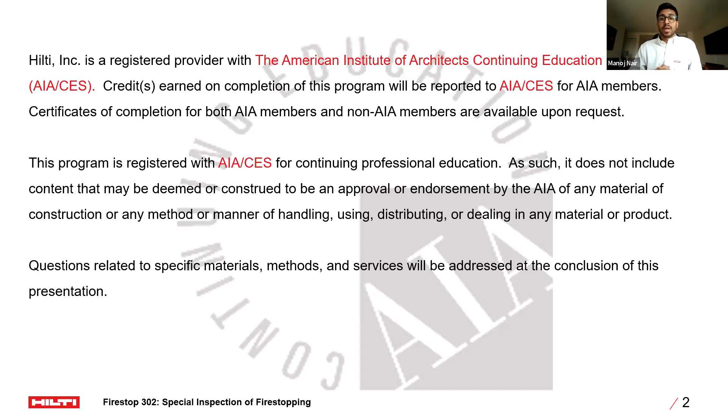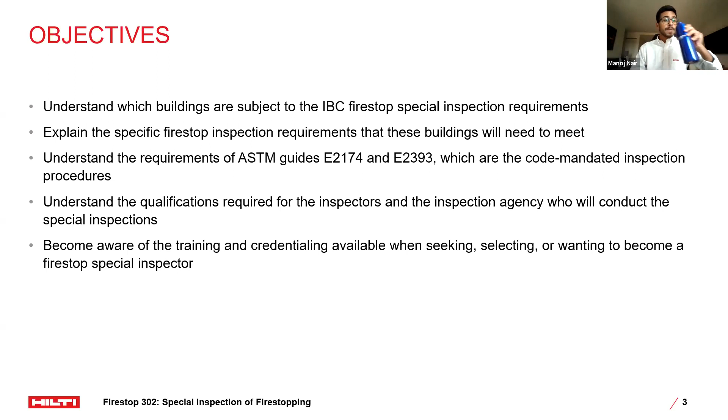There's going to be a few points across the presentation where we'll take a quick moment to see if there are any questions. I'm also going to be speaking up and asking questions. I love interactive presentations, I think it's a good way for everyone to absorb the information. So feel free to hop off mute briefly. I know it can be kind of tricky in Zoom calls, people talking over each other, but no rush for time. If I ask any questions along the way, don't be shy, please speak up. Really excited to present to you guys today, and we'll go ahead and dive in.

Really at a high level, what exactly is a special inspection?

Can anyone tell me an experience they've had with a special inspection, or just your general understanding of what a special inspection is?

No? All right, no worries, we can keep rolling with it. By the way, if I keep looking over to my right, my screen's here, this is where you guys are, so my eyes might be darting here and there a couple of times.

Hey Manoj, just a real quick thing. The very good thing about third-party inspection, and Wayne will be involved as well to explain this - it's great because the whole code requirement, we want to make sure everybody's installing systems 100% correct. That's the key thing, and that's where Code Red, third-party inspection, Vericon, all these companies that do this, they're going to be actually involved with this. So he'll get involved and answer any questions as well. Anything on this, keep us posted. Perfect, thanks Chris, yeah, very good point.

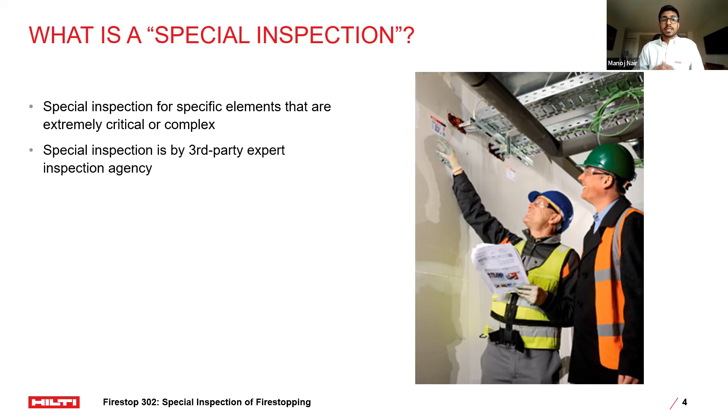Everything's about systems, and we'll dive into that a little later in the presentation. Special inspections are specifically for elements or applications that are extremely critical or complex. Generally, the authority having jurisdiction is going to carry out inspections for the project, but with certain applications or elements of the project that require the inspector to have really in-depth knowledge and experience about that application or element, that's exactly where the special inspectors or third-party inspection agencies come in.

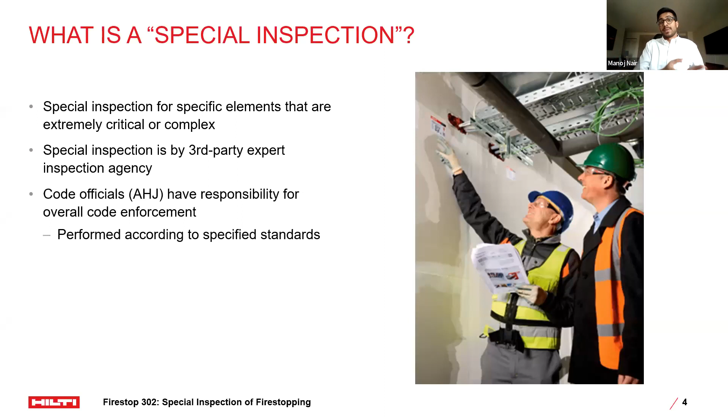So the authority having jurisdiction is still a key member when it comes to choosing the special inspector or the special inspection agency. However, they're not going to be the ones actually carrying out the inspection. I'm going to be saying inspection, special inspection throughout the presentation - it's going to be a bit of a tongue twister, but I'm always referring to the special inspection that the whole presentation is about in general.

Special inspections are mandated within the code, within Chapter 17, and there are various different types. We like to split them up into 3 high-level types. One of them being just ensuring that the building and the location that the building is built on is structurally sound - that's going to be special inspections for what you see here on the left-hand side.

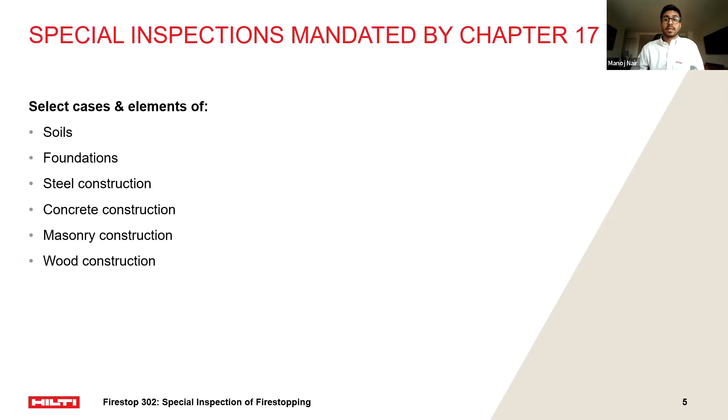Then we're going to be having special inspections to ensure that the building can resist the various loads that it's expected to endure throughout its lifetime. And as you see here, that's going to be these two: wind resistance and seismic resistance, depending on location.

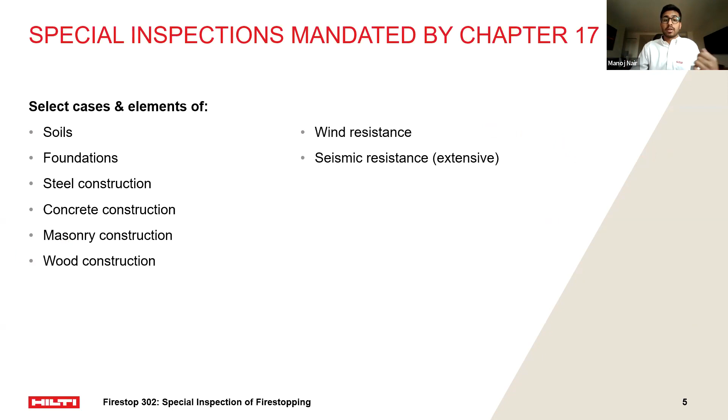And lastly, we have really what's going to be our main conversation point for today - how exactly does the building react in the event of a fire within the building. More specifically, this last section, special inspection of fire stopping. However, there are inspections for smoke control or intumescent fire resistant steel coatings as well.

That's something that Hilti covers and has products for and information for as well. So if you guys ever come across any questions for fire resistant steel coating, don't hesitate to reach out to myself or Chris as well, and we'll be able to help you with any questions. We actually have personnel specifically for steel coatings as well.

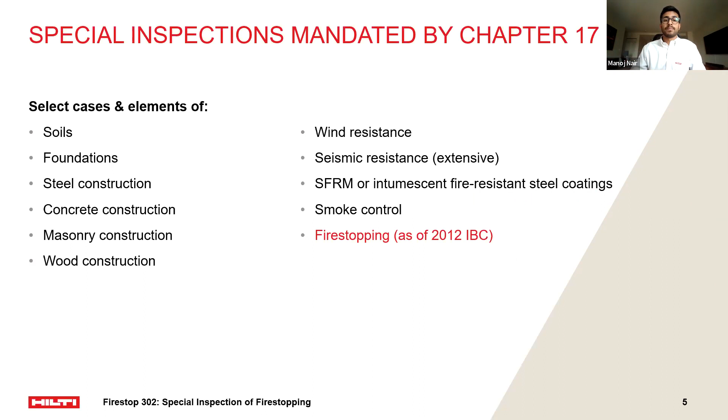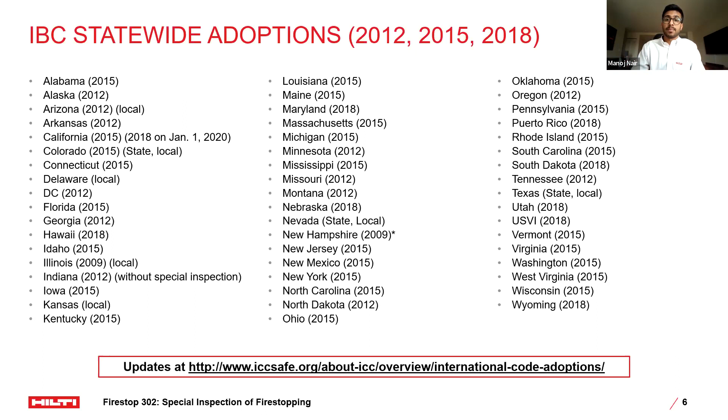For federal or government buildings, there are going to be some specific guides or verbiage for that. However, it's going to be fairly similar to what you see in IBC 2015. In terms of requirements for a special inspector, they're going to have similar verbiage needing similar experience in actual work experience, as well as the proper education and certification.

We'll be talking a little later in the presentation. Really, the last section is going to be about the certification process and all the content that goes with it. But the main thing to take away, which we'll dive into deeper later, is what are the exact requirements ASTM standards have that the inspector needs to be able to fulfill.

So we talked about what exactly is the special inspection, what that entails, and who's going to be involved. Now we're going to talk about what type of projects actually require special inspections. This is called out in chapter 17, more specifically section 1705-17, as you see on the left-hand side.

Sorry, my mouth is getting really dry. I don't know if it's this cold weather, but I'm going to take a couple water breaks here and there. So this is a bit of a meaty bullet point.

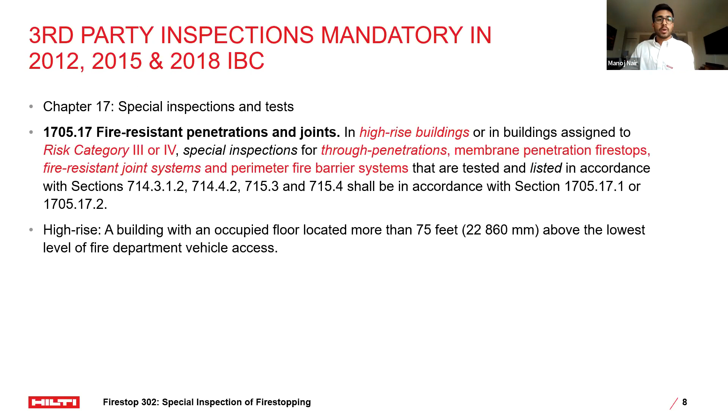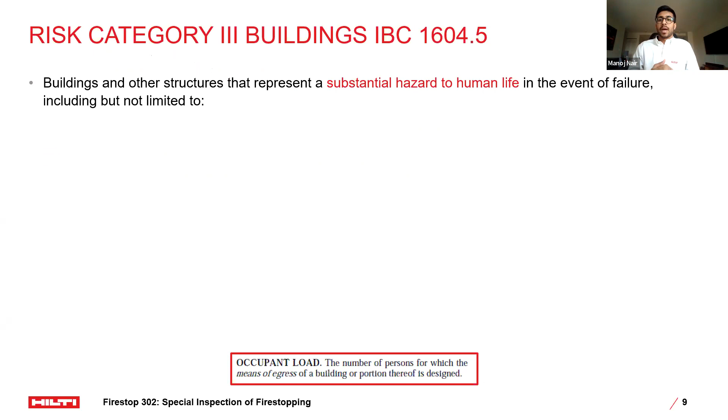So as we said, high-rise buildings, risk category 3 and risk category 4 buildings. Risk category 3 is any type of building that represents a substantial hazard to human life in the event of a failure. So these are buildings like public assemblies, schools, emergency treatment facilities, prisons, and any building with an occupancy load of more than 5,000 occupants. In addition, you have power generating stations, and any building not included within risk category 4 that has toxic or explosive materials.

We just want to make sure that these buildings with a large number of occupants are up to standard and have fire stop systems installed correctly. The trend you'll see across these bullet points is you want the installation of the system to be code compliant, accurate and consistent. So when we talk about the new technologies within the fire stop industry a little later, that's really going to become a key word: consistent and accurate installation. We'll touch on it a little later.

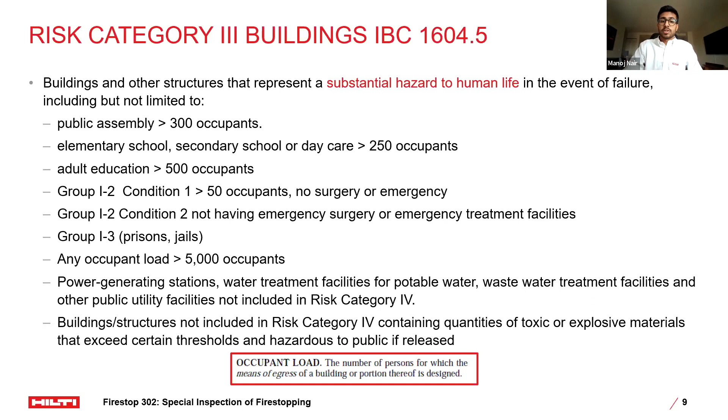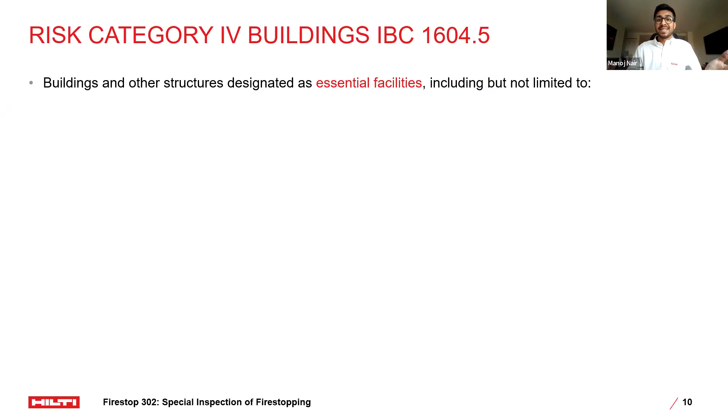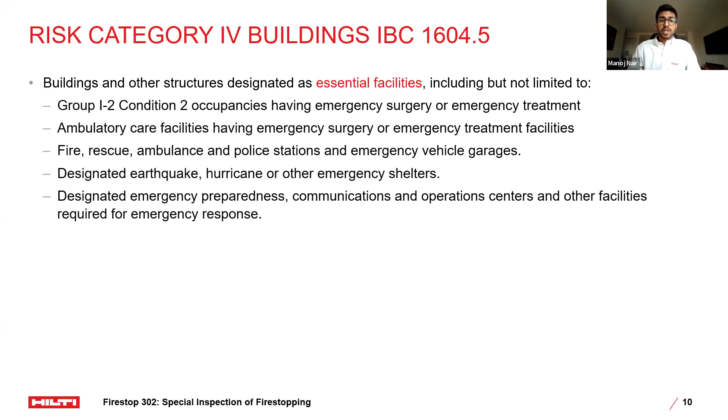Next we have risk category 4 buildings. These are buildings designated as essential facilities. I generally like to look at these as the buildings that our community relies on, whether it's day-to-day or if a natural disaster occurs. So those are buildings such as emergency treatment facilities, police stations, emergency shelters, communications and operations facilities. Again, power generating stations for public utilities, control towers, etc. Really the places that our communities rely on.

So it's our responsibility to ensure that we're installing the correct, accurate, code compliant fire stop system, and that it's actually going to work in the event of a fire in one of these areas. It's a little tricky because we're designing for a worst case scenario, but when that scenario happens, it's extremely important because the lives of our communities are in our hands in a way. So it's really important that we're making the right decisions, trying to be as accurate and consistent as possible.

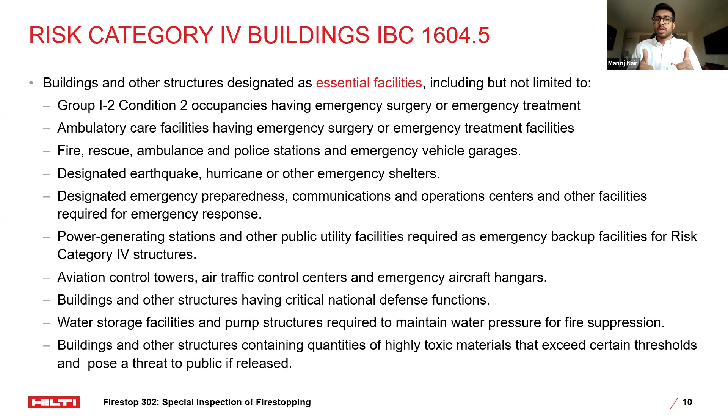So any questions so far on these various topics? I don't see anything in the chat, so I think we're good to go. You're good, so we'll go ahead and roll into the actual requirements of these special inspections.

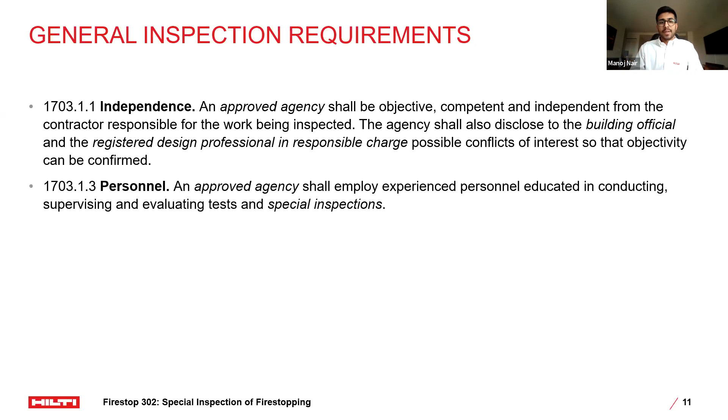The agency for this special inspection cannot have any conflicts of interest with the actual installers or contractors. You're going to see this term a few times in this presentation: approved agency. This means the agency has been approved by the authority having jurisdiction. The authority having jurisdiction doesn't carry out these special inspections, but they're a key player in determining who will. They'll get a submittal from the owner or the owner's representative proposing the special inspector agency, and they'll look at their credentials, whether it's experience or specific certifications, to judge whether they're appropriate to carry out that special inspection. The personnel within this approved agency must have that appropriate background and experience as well.

So who exactly is writing the check for the special inspection? As it says here in red, the owner or the owner's authorized agent is going to be the one paying for the special inspection. Another key thing to note is that the smoother this process goes, the less time it takes, the less the owner has to pay. So the influence you have as a specifier, selecting the appropriate systems and using the latest technologies when it comes to firestopping, can make that special inspection process go more smoothly, potentially saving the owner money and general headaches.

I know from some specifiers I've spoken to in the past, RFIs can be used as a metric. Generally you want to have fewer RFIs per project. Obviously, things happen on site and issues come up, that's just the way of the world. But if you're able to select firestop systems early in the process and communicate those to the contractor, you can control what type of products or technology is used to ensure that process goes smoothly.

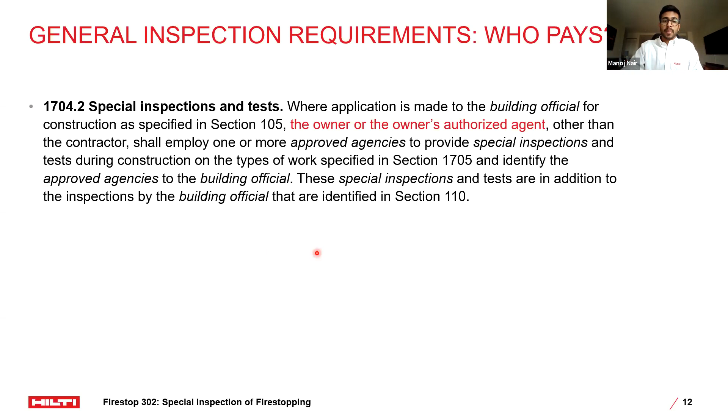We talked a lot about the actual process of getting the inspector on, and I've mentioned experience and qualifications, but there are actually specific ASTM standards that call out these qualifications: competence and relevant experience or training for special inspectors, as well as related complexity to the same type of special inspection or testing activities for projects of similar complexity and material qualities.

So what exactly does that mean? This gets a little wordy, but what it's saying is the inspector carrying out the inspection for a specific project type has to have relevant experience. For example, if they've been inspecting schools for firestopping their entire career, and then they're proposed to do something like a manufacturing plant or a power plant, they may not have the relevant experience to know what to look for based on the applications commonly seen there. So it's really important that the special inspector being called out has that relevant experience.

In addition to an inspection agency, a design professional can be responsible or involved within that process, but they still need similar requirements and qualifications.

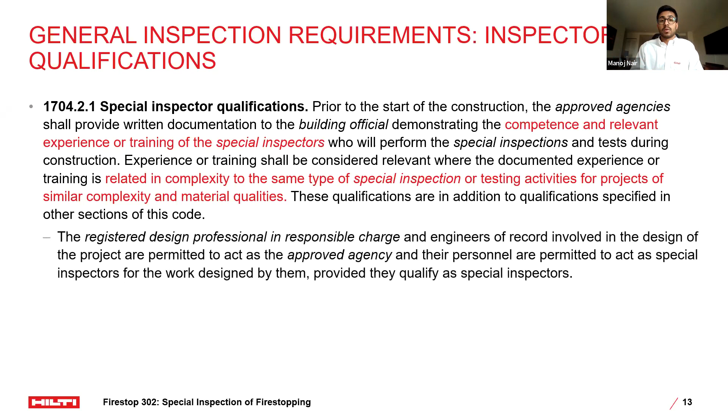So I mentioned in the previous slide that there are specific ASTM standards that call out these requirements. They are ASTM E2174 and ASTM E2393. Off the bat, acceptable by the AHJ, kind of a no-brainer at this point, they're going to need to make sure they're qualified. These are some of the qualifications they'll look at. As you can see at the end, these are all 'ors,' so it can be one or the other, meeting certain criteria. You'll see the standard a little later in the presentation.

Minimum two years of inspection experience or being part of a quality assurance agency. We'll talk about what that is a little later in the presentation, but at a high level, it's an agency that has been accredited for special inspections, and they get that by having personnel with the appropriate qualifications. Again, as I mentioned earlier, no conflicts of interest.

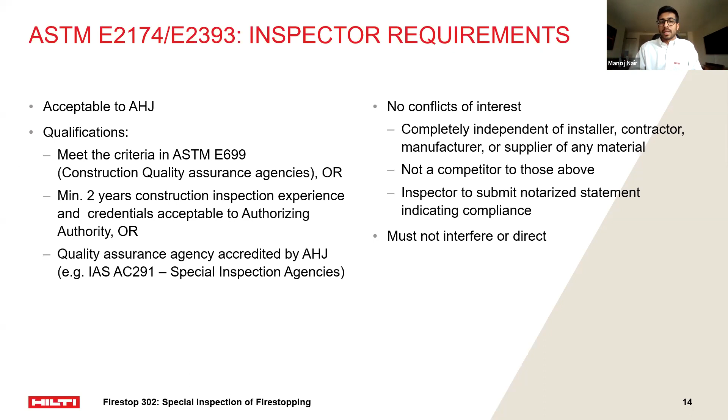So the special inspector cannot have any sort of competition with the contractor who did the firestop installations throughout the project, and they must generally be completely independent of them. Again, kind of a no-brainer, there just can't be any conflict of interest, as in normal projects.

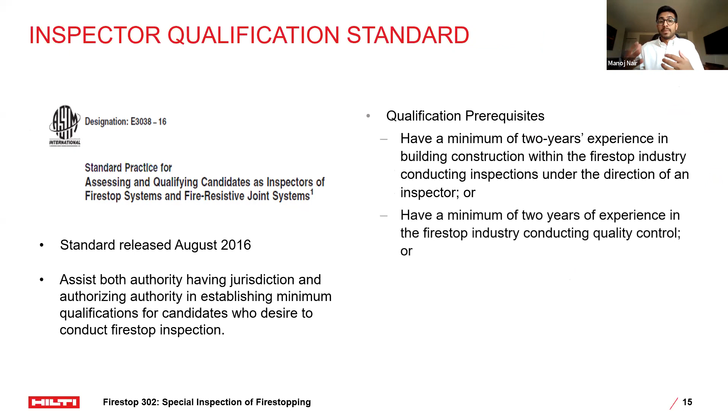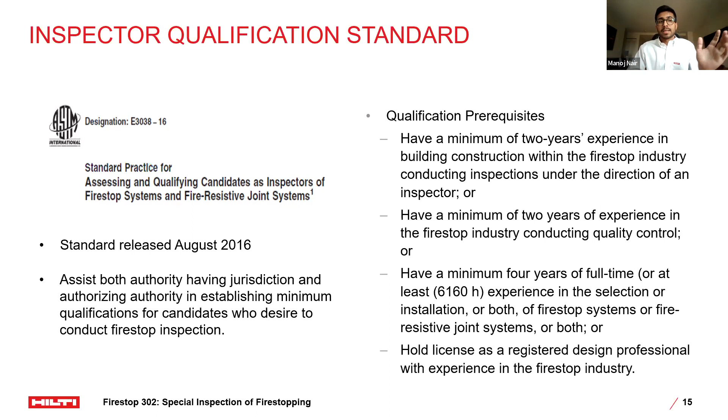In addition to that, there is an inspector qualification standard, fairly similar to what we saw before. These are the prerequisites on the right-hand side of the screen: minimum experience within the construction industry as well as the firestop industry specifically, minimum experience conducting quality control, and minimum experience when it comes to selection or installation of firestopping. This resonates very similarly to what Wayne said his experience is, working with Hilti as a manufacturer rep, working for a contractor, and now doing the special inspections and carrying them out himself. Lastly, you have the option of holding a license as a registered design professional, as I mentioned a little earlier in the presentation.

So how exactly is this inspection conducted? I'm going to read these brief bullet points, but Wayne, if you can, I'd like you to jump in afterwards and give us a rundown of what that process looks like.

As I mentioned earlier, the two sections that call out the different applications that are part of these special inspections are seen here. It's for penetration firestopping, as well as fire resistant joint firestopping. These two standards at the bottom, ASTM E2174 and E2393, call out these processes as well. So again, the approved agency needs to be in accordance with those.

Wayne, I'll hand it off to you if you want to talk about your experience. Well, let me keep it as simple as possible by talking about the two standards. Both of these standards have been around - 2174 was first published in 2001, and I think 2393 came out in 2004.

2174 says that you must conduct - there's two options, and really only one of them works. The two options are to do installation observation, which says you have to observe the actual installation of the firestop system for 10% of all the firestops on a project, and you have to do that randomly. In 2001, when the initial group put this together, this was all very new and it seemed like a feasible thing.

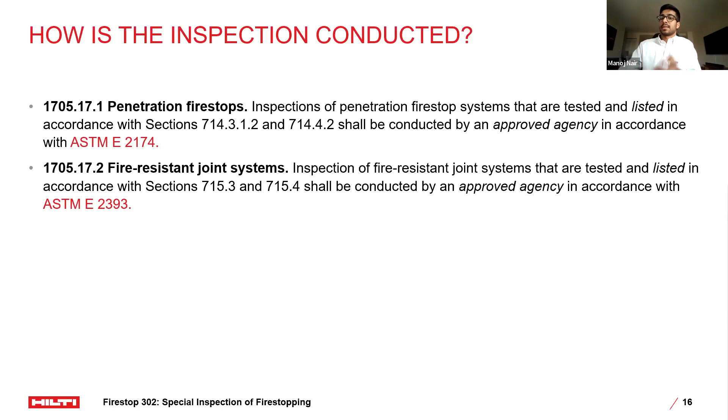We'll go ahead and roll into the next slide on the topics you brought up about the actual inspection process. As you mentioned, statistical sampling is very similar to destructive testing—making sure you have the right amount of mineral wool as well as Firestop product, whether it's sealant or spray. In addition to that, verifying the materials prior to installation. The next one, a really important one, is verifying against listed systems and/or EJs.

Again, you might be able to speak on this as well, Wayne. When you're inspecting a specific system, from my understanding you take the physical system that's been submitted and approved, and then compare that to the actual installed system to make sure they're correct and both are code compliant.

That's correct. This is one of the things we kind of pound on again and again—a lot of GCs and traditional subs are not used to this process. They have rarely, if ever, had their Firestop installation fail in the past. The building officials, vast majority of them will readily admit that even if they had the depth of knowledge needed to inspect this, they don't have the time.

Just speaking for Vericon, we're typically on site about 6 hours for an inspection on your average commercial project—sometimes as little as 4, but rarely less than that. To be able to go through all these things, hit the numbers in terms of the percentage of destructive testing we have to do, we're doing a lot of review in the office before we get on site of the systems and EJs.

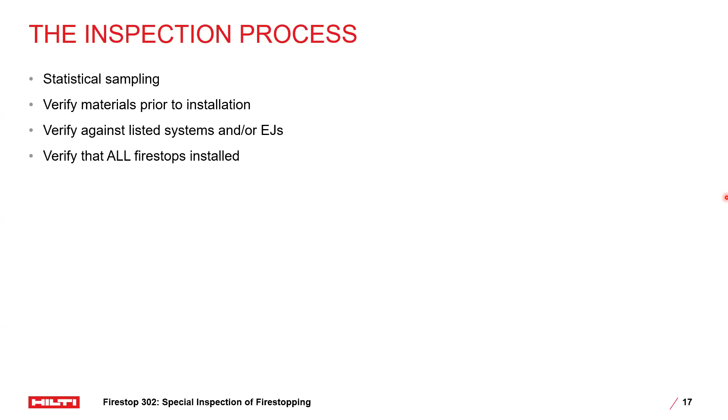Now, the reason I'm mentioning this, and where you as an architect have influence, is for one, calling out specific preformed devices in the specifications - that's one way of influencing it. Another is providing a firestop schedule for that specific project.

I mentioned earlier that EJs come up, it's just part of life, and they need to be dealt with on site. However, there are a lot of general applications that can be seen across a project. So being able to call out the specific systems that utilize preformed devices, and submitting that to the contractors and having the subcontractors use it, gives you more control over the consistency and quality of the installation.

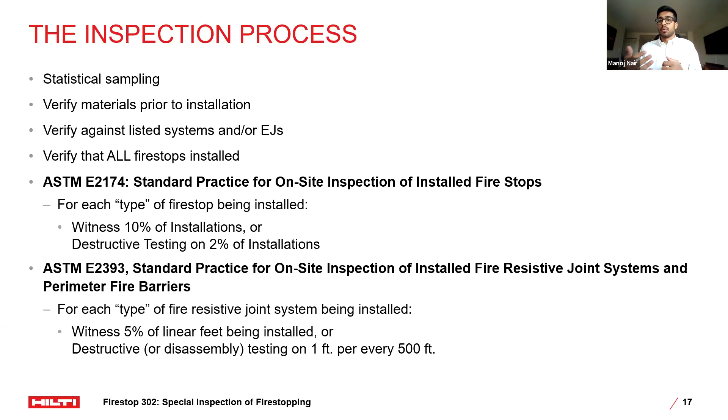Now I want to pass it on to Chris, our fire protection specialist. He has an immense amount of experience in the field, so I wanted to talk through what he sees in the field in terms of the benefits and what this inspection process looks like from his end.

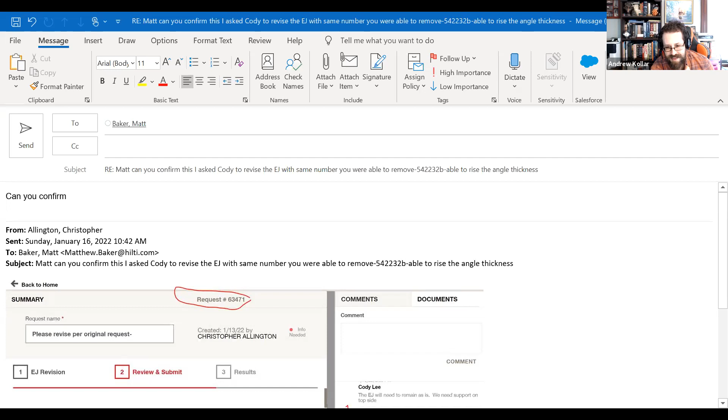Okay, can everybody hear me okay now? Hear you just fine. All right, perfect. Is it possible, how do I share my screen on this? I always do Teams meetings, I don't do this too much. Normally the easiest way is to make you into a co-host. Oh, there we go. We're sharing mine, and it'll be an option for him. I'm just looking at the different areas to see if I could sign on to this. Why am I not seeing you? I think you'll need to stop sharing your screen also. Okay, done. Let's see if we can make a co-host. Try it now. Okay, what do I do? On the bottom of the screen there should be something that says share screen. Got it, perfect. Click that and follow the directions. Hopefully I'm doing this - wait a minute. You should see all your different options pop up, and you can select the one you want to show us. That's what I'm trying to search. This is interesting, how do I find it? If you already have it opened - oh, there we go, now I can see your screen. All right, can everybody see this right here? Yes, we can see an email. It looks like an email to Matt Baker. No, how do I do this? I don't want to tie you guys up on time here. I've got a presentation on here right now. Do you have multiple screens on your computer? Oh yeah, I think you shared the wrong screen. If it's easier, grab what's on the other screen and move it onto this one and switch them. Yeah, that's what I'm trying, but again. Let me stop sharing and share again - it should give you a choice of which screen to present.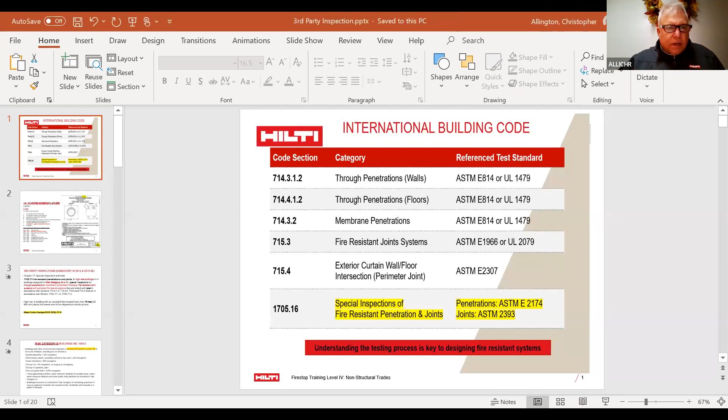Okay, and again, this is stuff that Manoj probably already kind of went through most of. I just wanted to cover a couple quick things on my presentation part. Again, you saw all this information that's listed right here. This is all the code requirements.

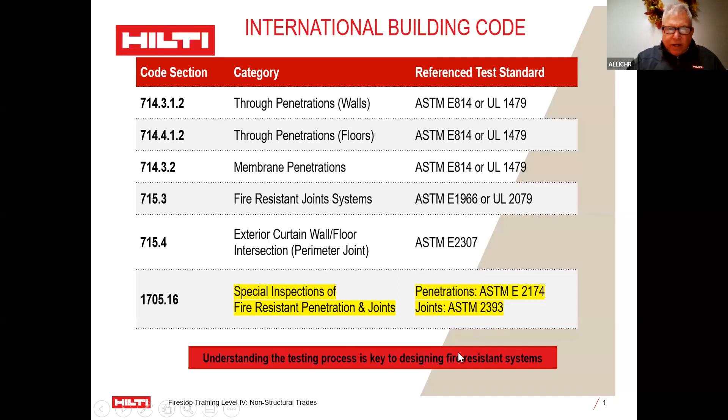And as mentioned, there's the third-party inspection information down below, which he already talked about. The main reason that I like to talk about this, when I do the training, and I work with Wayne quite a bit on a lot of projects. He does a great job.

Biggest thing, a lot of people just install firestop material. Can anybody tell me what the rating of a firestop product is? I need an answer from someone. I mean, it seems like a silly question. It depends on what wall you're sealing. Okay, not one size fits all. Well, again, correct. So when I always bring up this point about firestop products, products are not rated.

You have to make sure you install a system. And that's why it's so important when on specs and stuff like that. If you notice this right here, does everybody see this detail? This is an example of a detail of a through-wall penetration. And notice it has a number assigned to it. It's a nomenclature from UL, Underwriter Laboratory.

So when they do the burn test and the hose stream test, they have to approve what manufacturer's product was actually used, and you'll notice it's listed there. And if you notice the numbers, notice W-L-1054, the letter W stands for wall, the letter L stands for a gypsum wall, and the number 1000 means you're dealing with a bare metal pipe, and it shows you all the information on how to firestop that according to plan.

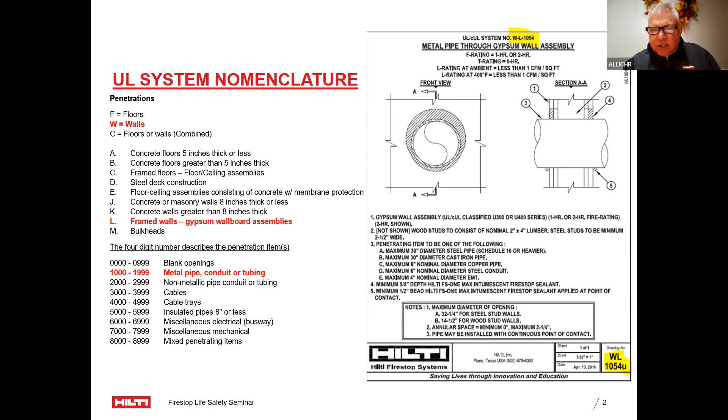So this is the most important thing when I do the training with everybody. I make sure that they follow the guidelines, because if somebody just squirts red stuff in a hole, they're no good. And a joint, same thing. That's why we have to make sure everybody follows what a guideline is of the UL detail. And he already covered all this information, so again, I don't need to go through this again.

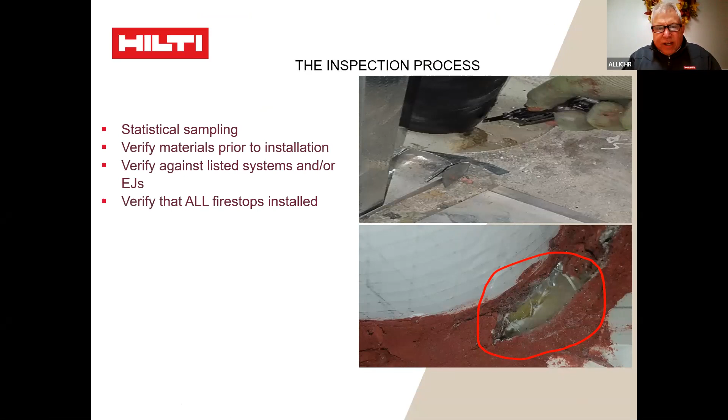This right here is an example, exactly to what Wayne just mentioned. Here's an example of penetrations when they do the third-party inspection. They'll actually cut out the samples. That's the 2% destructive testing minimum, to make sure the installation of the products is getting done 100% correct. Does everybody see that? I just want to make sure I can show how this actually looks.

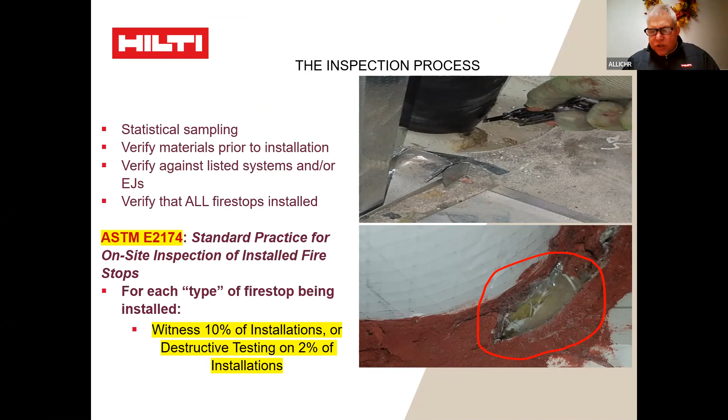4 PCF is pounds per cubic foot. Sometimes if somebody doesn't put the right compression or the right mineral wool in here, that's where they're going to fail, because it doesn't meet the requirement, since they have to have a deflection capability for the floor above. So for joints, it's very important to make sure people are following that guideline.

To the point that Manoj already talked about, the preformed products like the TTS product and stuff like that. That's just an example. Anything that's preformed also helps out, because now they don't have to worry about putting in a certain compression of mineral wool if they go that route. Again, just options, I want to make sure everybody gets that.

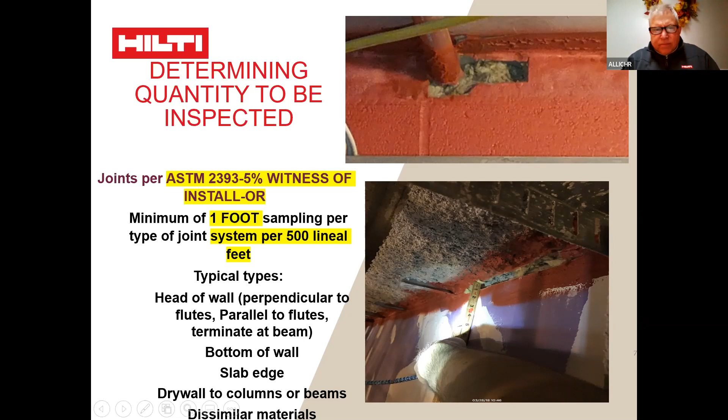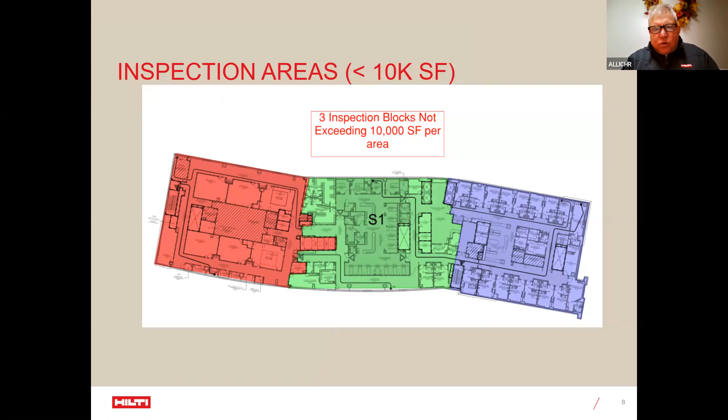And then when they do the inspection, I'm just not sure if Wayne wants to talk about any of this, they do certain areas not exceeding 10,000 square feet. They'll actually do certain sections for those third-party inspections.

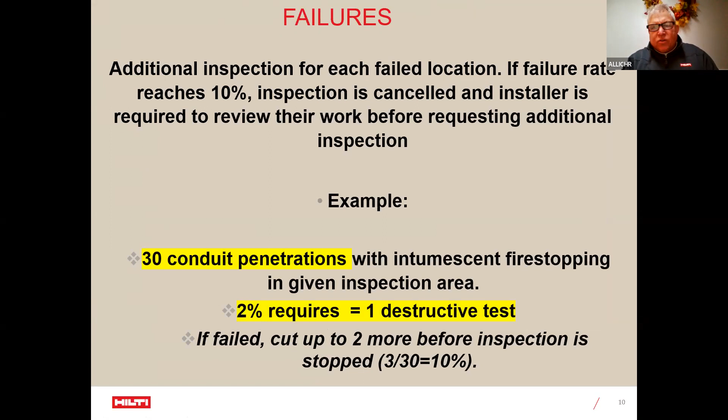If there's failures, like Wayne already mentioned, this is all the information that I give everybody as code guidance. If there's a failure, that's going to hold up the project, and that means walls can't go back up anymore, things can't proceed. So it's very good to make sure we meet these descriptions of these installations.

This right here is an example of some penetrations that were fire stopped. A lot of times, maybe in your specs, it calls out that the fire stopping needs to have a system number assigned to it. This sample shows what the UL system number is and what the fire stopping is. When the inspector reads this, they go through and verify the depth of product and how it's installed.

One thing I'll bring up - let's say this is a rated wall. Notice all the gypsum installed - did they mud and tape the actual butt joints yet? No, and that could be an issue, because if somebody fire stops this before the wall is finished, you want to make sure the UL wall details are constructed properly. If someone just puts a bunch of fire stopping around this, it'll be very difficult to actually get the wall rating built properly.

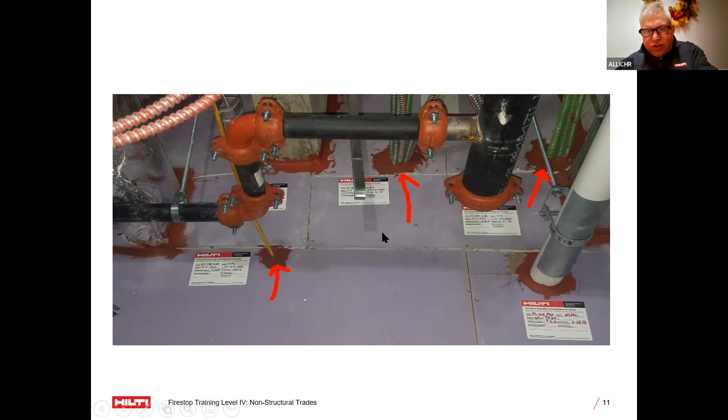This is all stuff I like to share and show during training and education. Even though somebody puts details up, these are all just examples of what the system is - it calls out what the actual UL number is right here. If you go down and read the UL detail, this number, WL7059, calls out a duct that's actually passing through this wall.

Unfortunately, when the measurement was done, it calls out that the duct was greater than 34 inches. If you read this detail, it calls out what the maximum duct size is - 24 by 12. Does that meet that fire stop system? Absolutely not, because the system numbers have to match what these details are. So that's why it's so important to make sure installers are following the guidelines of the details.

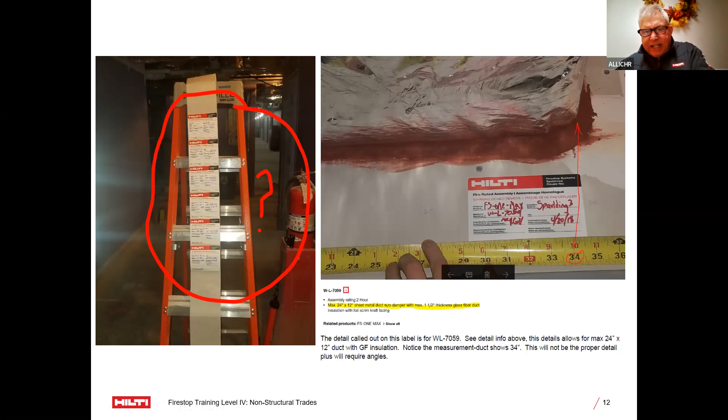I only have a couple more slides I want to share, but does everybody know the terminology? I think Manoj already talked a little bit about this, but this is something I definitely want to make sure everybody gets. When you look at the different walls, notice they have different wall type names.

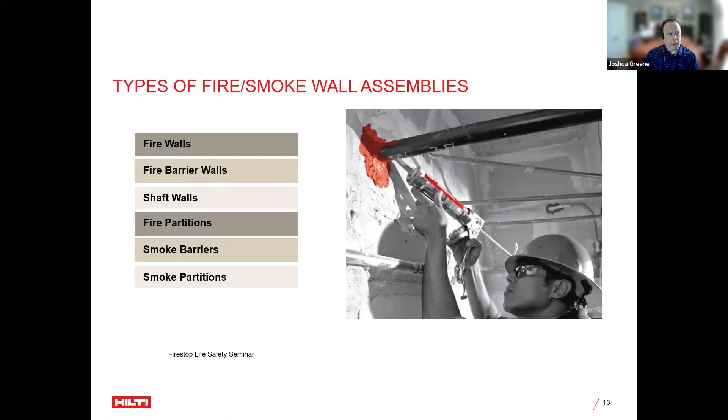The biggest question I always ask people: when you look at a smoke wall, see these two right here? Are smoke walls required to maintain a fire rating? It depends - smoke barriers have a 1 hour rating in certain applications, smoke partitions do not. That's why a lot of people don't know that. They hear the term smoke, and the next question I ask is, if it's a smoke wall, find out - is it a barrier or a partition? Exactly what you just said, Josh.

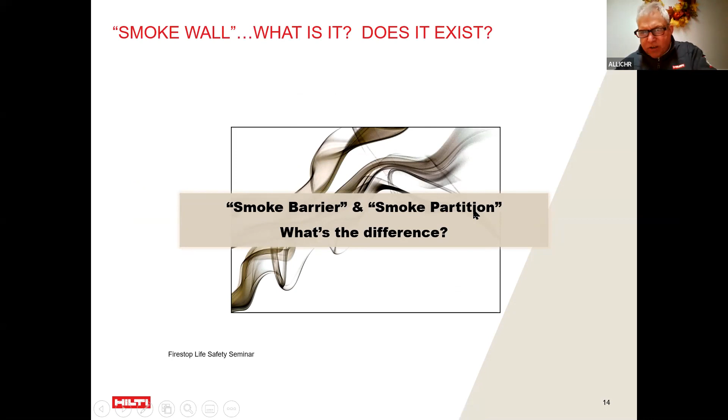When you do that, where is a smoke barrier wall required? They're required either in hospitals or prisons. Why? Because if there's ever a fire in a building, what are people supposed to do when the fire alarm goes off - everybody's supposed to leave the building. If you're in a prison or a hospital, can everybody just leave the building if there's a fire? No. So that's why these walls have to be built and protected properly.

Does everybody know what L rating stands for? This is another key thing, because you'll notice this right here - when you deal with a smoke barrier, in addition to a fire rating, minimum 1 hour, you also have to maintain an L rating. L rating is air leakage. If the system that was installed doesn't follow the guideline of what an L rating stands for, that's going to be an issue.

It doesn't meet the code requirement. So again, this is something that I put on there. I just want to make sure everybody understands that as well.

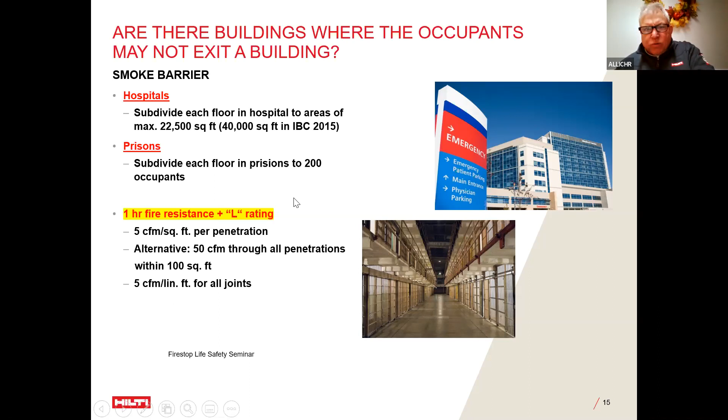When you look at this, check this out right here. Here's a third floor, and let's say this is in a building requiring a smoke barrier. Look what just happened right here. The whole intent is this wall now, because it's a smoke barrier, has to maintain a fire rating, minimum 1 hour, and an L rating. Because if there's a fire on this side, you have to move everybody over to the other side, or versus this way, if it goes this way.

This wall has to protect everyone, because what's the leading killer in a fire? Smoke and gases. Yep, exactly. So that's why L ratings are so critical when you deal with these smoke barriers, okay? So again, that's just one of the key things that I go through, and I go through all this information.

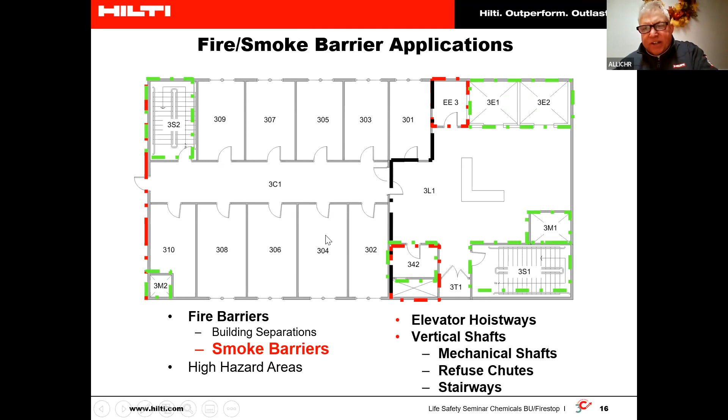You'll notice not every wall is fire rated. And the reason I bring that up, I just want to make sure everybody understands this also. When you deal with a smoke partition, walls are not fire rated, okay?

So anytime you deal with a wall that is not rated, it's just calling out a smoke wall, okay? You want to make sure you use a product that is approved to meet that. Most manufacturers have products that do that, okay? But again, a lot of times if somebody just used mud and tape around a penetration, it does not meet this code requirement. So just a heads up on that. That's one part of the trainings that I deal with as well.

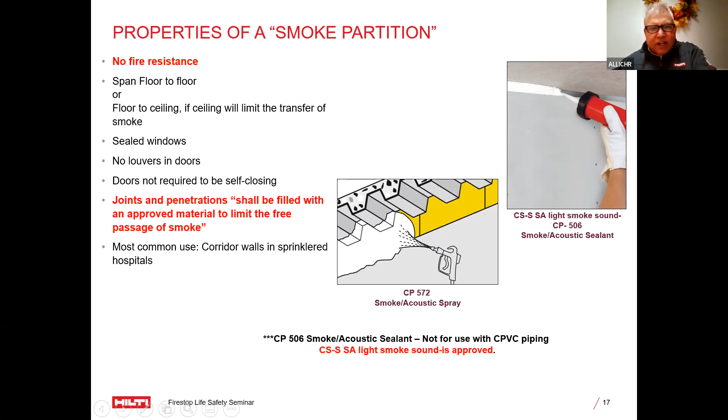These are always going to list what the UL system numbers are prior to the inspection, okay? So this is when I do my training. I make sure that everybody follows the guidelines, and they make sure that they follow what the detail is and how the fire stopping has to be installed.

Most important that goes on these letters is the actual UL listing. And if it's not a UL detail, we have to create an EJ, which again, I think Manoj already mentioned that. EJs are engineering judgments. That's a field condition that may not meet a UL system, that the manufacturer can actually design and we can sign off on to help out with the installation.

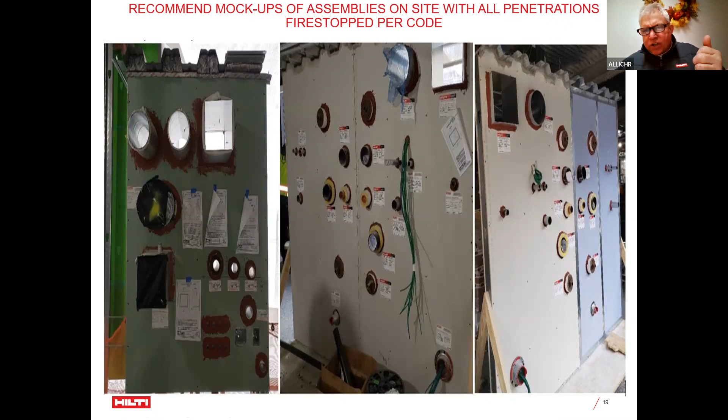So we always want to make sure before anybody installs a fire stop material, whatever the manufacturer is, make sure they have a detail, whether it's a UL system or an EJ, okay? So that's pretty much the key. That's pretty much my information and stuff like that. And this is all the stuff that I kind of guide and help on. So hopefully that was helpful. If there's any questions I can answer, just please keep me posted on this.

And again, if Wayne wants to add anything to this information, because again, he knows the L rating. He's been talking about this on many projects as well. So we just want to make sure we cover that. L ratings are so important when you're dealing with a smoke barrier wall. Okay, again, thank you. If any questions, please bring them up.

If I can interject, Chris, you've been tremendously helpful on a lot of my projects by coming into the field during construction to give assistance to the contractor. So if he runs into a problem, everybody should know that Hilti is available. And I believe this is true of other manufacturers too. But you've helped out where we had some odd conditions and the installers could not figure out how to do it. And you were actually able to come out and help them develop a system to do it.

And then you issued the EJ to address those issues as well. Yes, exactly. And again, great to see you, Jake. I haven't seen you in a bit, but nice to see you. Thank you for your time.

That's why all I do with the company is go out and train everybody, educate as many people as possible on site, to make sure people are following the guidance and guidelines. Because even on a job that's not getting third-party inspected, that same company could go to one tomorrow that is getting third-party inspected, and suddenly ask why is this so different. They have to follow the guidelines no matter what job they're on, even if not third-party inspected, following the systems and installation exactly based on these code standards. So anything that's ASTM 2174, ASTM 1966, Edge of Slab 2307 - those are all standards and code requirements that everybody has to meet.

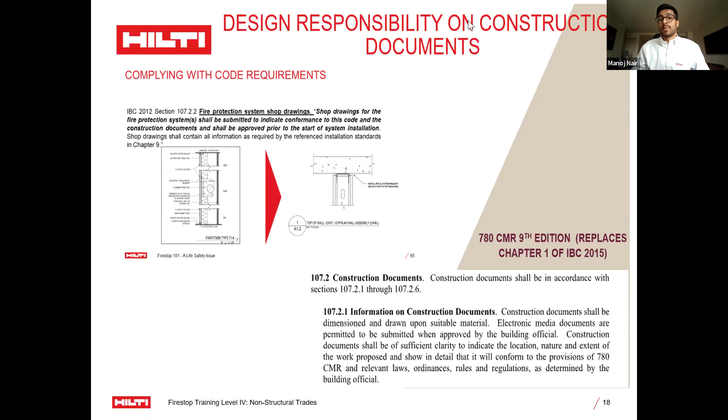So just a bit of context on that technology. I'm going to go ahead and share my screen once again, and we can hop back in. Can you guys see my screen? Give it a thumbs up. We can, yes. Perfect. Thanks, Andrew.

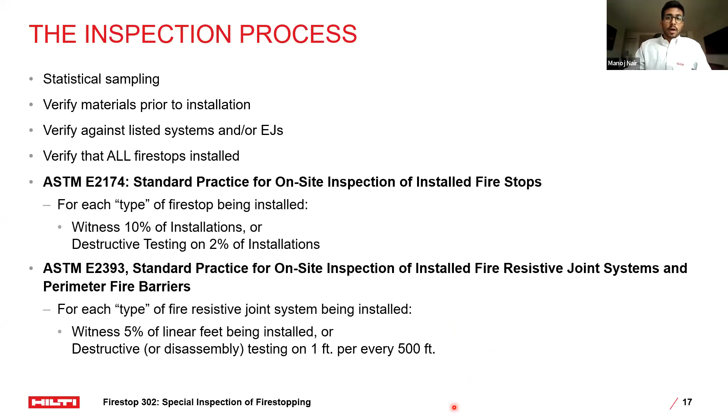All right, so really continuing what we said, I think Wayne mentioned this earlier. If a non-compliance is identified, according to these points here, 10% of non-compliance for one specific application, inspection is halted and they have to re-inspect their work. Obviously, a non-compliant fire stop system has to be replaced or repaired.

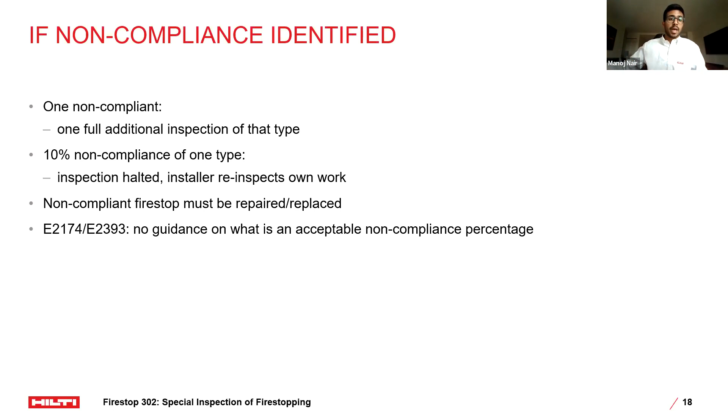There's no specific guidance called out for accepting a non-compliance percentage. Overall, Wayne talked a lot about this. I think the big key points are the setbacks that you have if a non-compliance is identified. So really, using your influence as a specifier, calling out specific systems early on in the process can really help with this later down the line to make sure there's as little non-compliances as possible.

So that wraps up the media section of the presentation. We're going to be kind of flying through this next section that's about the actual education behind inspector training. But any questions so far? We've had some people speak up, which is great, but nothing else in the chat right now. Awesome, we've done pretty good with people just talking today. We'll adjust, that's fine. All right, thanks, Andrew, keep it rolling.

This is just a snippet from the IFC website. This specific section is about the IFC education program and the exam for the certification. Really, the big thing that I'd like you guys to take away is it's just a great resource. These next couple slides talk about whether you're interested in being a special inspector and getting the education to become a fire stop special inspector. They have the content online for free on the IFC website.

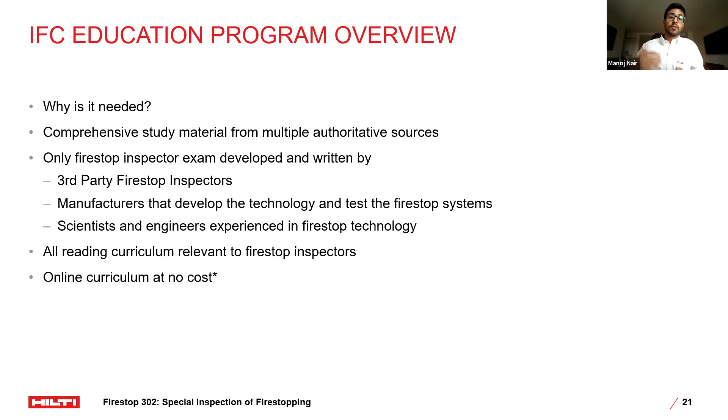And like I said, free, no cost. And then you can actually pay to take an exam. I believe it's $500 to take the exam, and if you're a government employee, it's $300. But more than anything, it's really just a great place to get an in-depth understanding of what special inspectors look for and really get into their mindset. Again, to be the best specifier early on in the process, you're going to want to understand what they're looking for later down the line.

Another thing, as we discussed earlier, is the owner is going to submit a submittal to the AHJ with the candidate that they want to carry out that special inspection. You can also provide information about who you want to carry out the special inspection by seeing who the certificate holders are, using the website link right here. But again, the main thing is it's just a great resource to learn more about this content.

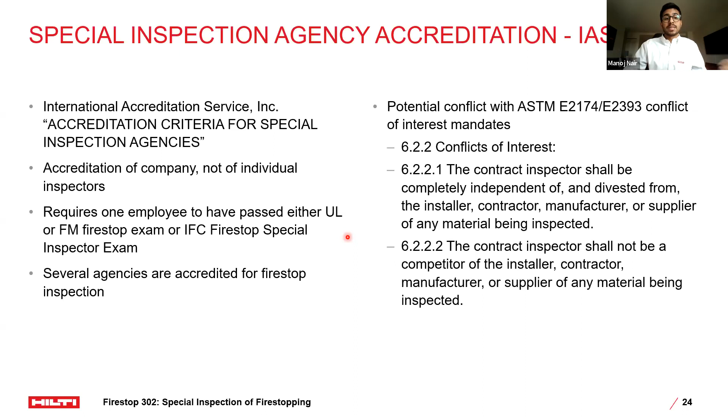So I mentioned earlier, and we saw this acronym earlier, IAS, International Accreditation Service. As I mentioned at the time, it's really an agency that has been accredited, and that's based on the personnel that they have and that personnel having the appropriate experience as well as certification, as it says here, having passed either the UL or FM or IFC special inspector exam.

So as I mentioned earlier, we had an objective slide. This is a summary slide summarizing the main topics that we talked about today. Again, what types of buildings are subject to these special inspections? What type of approval does the agency and/or special inspector need? What exactly does that special inspection process look like? Who's paying for it and who does it impact?

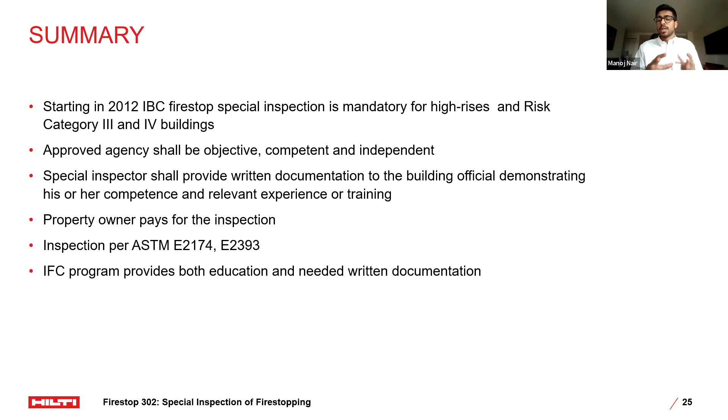As I said earlier, the owner is really the one making the payment, as well as the impact in the case that things are delayed due to non-compliances that are identified. And then lastly, we talked about the actual IFC program, again a resource for education. I know I flew through those last points, I just wanted to have some extra time for questions at the end because there's one last small section left. But if you guys need any more information about the IFC program, don't hesitate to reach out. I'd be more than happy to connect you and get you that content.

This concludes the AIA section of the presentation. Next, I'm going to show you a couple of examples of those preformed devices and then talk more about how Hilti supports the office and job site.

Chris mentioned the support he provides in the field, whether it's training, walkthroughs, etc., with the contractors. Very similarly, I provide similar support, but in the office to yourselves as specifiers.

That includes specification review, especially when there's new technologies coming out. You want to make sure you have the most up-to-date products in there, so that when a general contractor is looking at the spec to see what products can be approved, the newest devices and technologies can be approved, and you don't have to submit for that and go through everything like that.

In addition, Firestop schedules, something I've mentioned a couple of times, having the systems early on for the general applications, listing them out, and being able to provide that to the contractor makes life a lot easier, so that systems that are potentially not code compliant are not selected and then submitted and have to be rejected, going through that whole process.

We know there's going to be things that come up on a job site where engineering judgments are going to be needed, and that's why we have our field support, such as Chris, as well as our other account managers and myself. But being able to knock out that bulk work in the beginning is extremely straightforward.

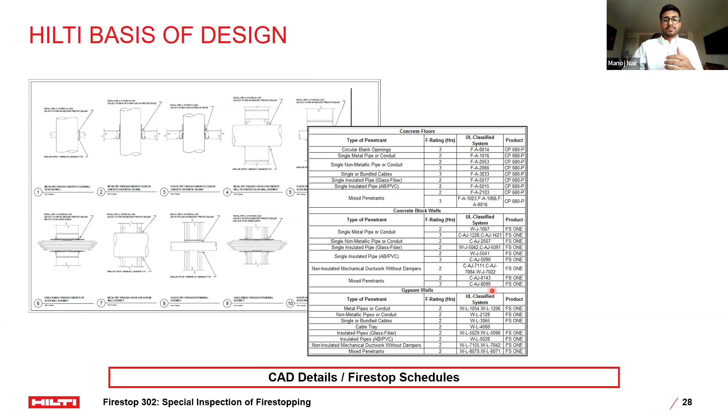In more recent years, even before I started with Hilti in 2020, Hilti's shifted to trying to be a partner instead of just solely a manufacturer. That's why things like BIM are becoming more relevant, because we're getting in earlier in the design process. Hilti has a ton of resources online, very similar to the IFC website, if you want to learn more about special inspection, Firestopping, or what's relevant in the world. It's veered towards specific Hilti products, but there's a ton of general content about the Firestop world on the website.

Another common application we see is for concrete over metal deck construction. If you have a pipe running through a floor or ceiling with metal deck construction, you can mount this product using self-tapping screws on top of the metal deck. This is the actual product, and again, this is an example of a Hilti product, but this technology exists elsewhere as well.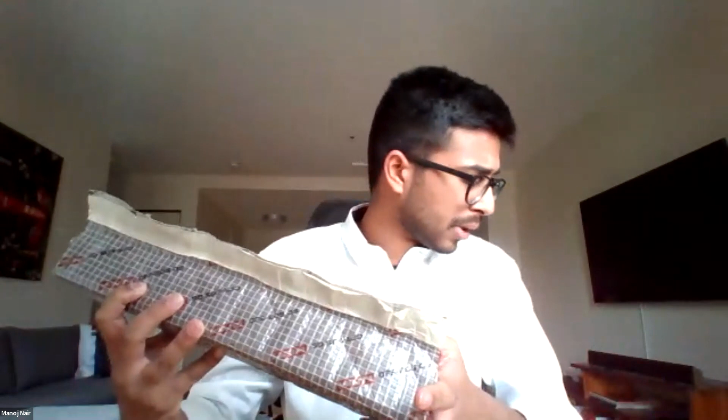The perfect amount of material is built in here. Instead of having to stuff in that mineral wool spray, you can just slide this unit inside the space between your curtain wall system and whatever is back there. It varies for different edge of slab applications, and then your concrete floor. So again, really simple product, really straightforward process, and no destructive testing necessary — it makes the whole inspection process a lot more smooth.

Any questions? I know it was a lot of content we covered today, but I hope it was extremely informative. To be honest, I learned some from speaking to Wen as well, so it was great having him on. It's those little details once you get into the field and have a lot of experience that really build up. So yeah, it's a really interesting topic. Any questions?